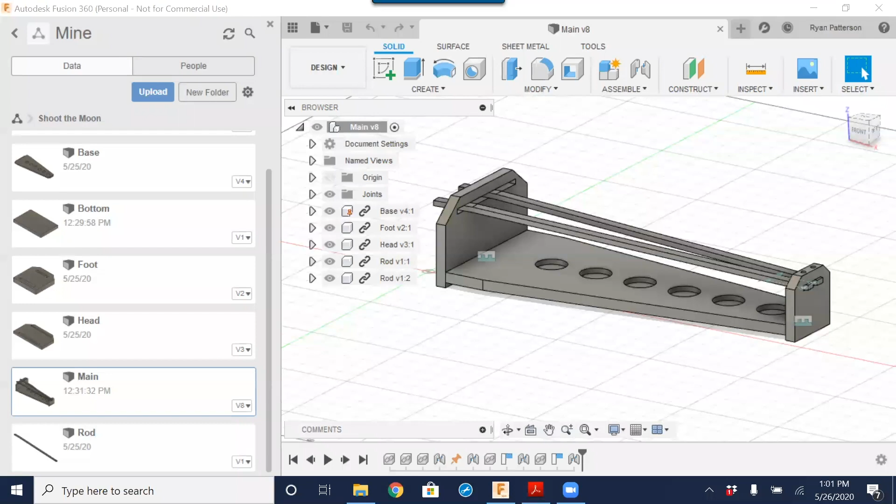So what Fusion is, it's more mechanical-based software that allows us to create individual components or parts and then assemble them as one to be able to constrain, lock them in, and build an assembly. And it's one way to really verify if all the parts are going to fit and function before you actually cut the product, build the product, and then in the end find out that that hole is in the wrong location. So what we see on the screen here now is the product that we're going to do.

We have it fairly well constrained. This is a game that is called Shoot the Moon. The idea of this game is we would set a little ball down here with this incline, and these here you raise in and out to try to get that ball to roll up the slope and drop it into the correct hole. So this is just a very basic assembly that we have. And again, today what we're going to be doing is focusing on drawing just the bottom section.

And I have a quick little drawing of what we have here. But before we get into the drawing, we have to orient ourselves with what Fusion is and how it lays out and works. So the first thing that we're going to look at is just the basic user interface. On the left side that we see here is kind of your projects. I call it the data pane. We could hide and show this pane by clicking the button here with the 9 little rectangles.

This is the area that is going to show all of your projects, all projects that are pinned by you, and projects that are shared with you or projects that you have shared. So this is a great way to work on a project as a team. You're able to share a project and multiple people are able to input and work on this project at the same time. So the first thing that we have, again, is the organization of what we have over here on the left side on the data pane. I am only showing projects that are owned by me.

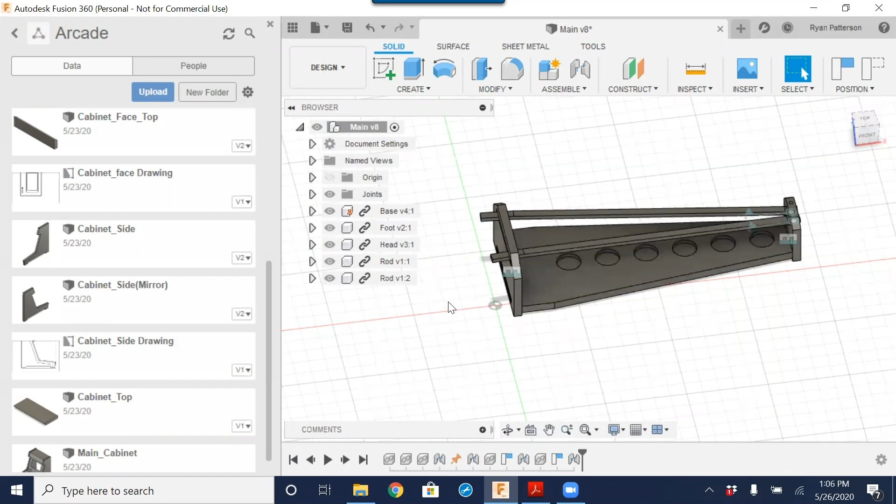And we're going to learn more about this as we go along. All components are able to be shared with one another, and only components or models that are within the same project can be shared with one another. So if I have my project up here, Arcade, and this product here that has several parts underneath it, I cannot share or link this part into this project. I'm able to make a copy of it and put it in here, but I'm not able to have it linked. We'll learn more about that as the days go on. So the first item that I would do is create one main project.

That main project will end up including all of your parts that you would ever make or that you would ever want to have shared within the project. So I created that with this project that's called Mine. That's all of my projects. Even though we have this item up here that's owned by me, each one of these listings is a separate project. So inside of this Mine project, I have created a folder and then a part.

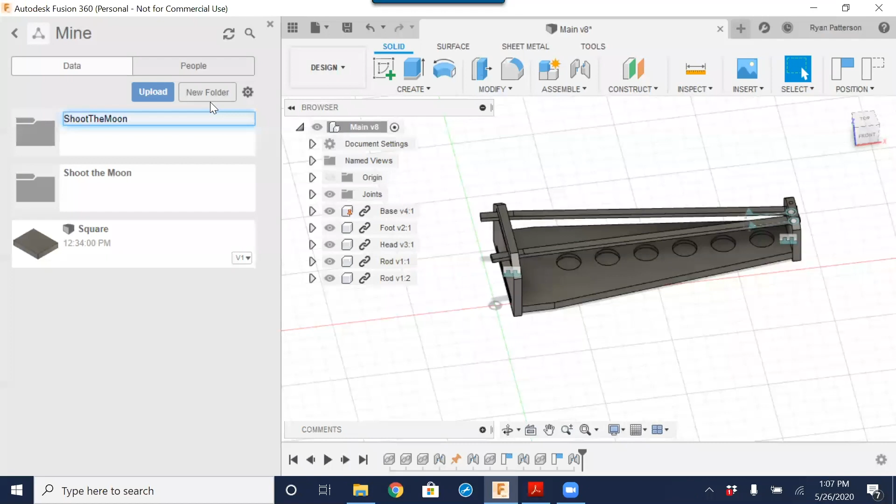So what we're going to do is create a new folder here, and I'm just going to call this Shoot the Moon 2. That just created a folder that I'm able to then add projects or add models and drawings to. So there is the folder on the left side.

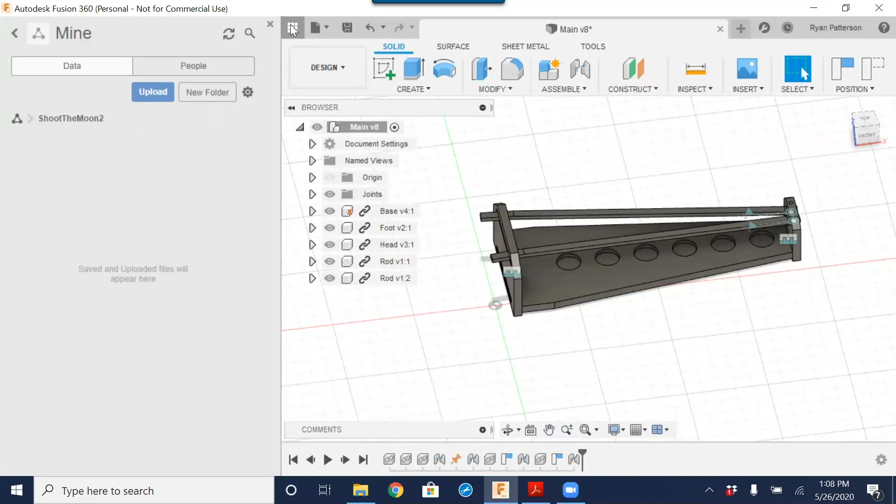I'm mainly going to be focusing within the application bar and our drawing canvas down below, so I'm going to close our data pane. We have multiple designs that we're able to have open at the same time. Currently, I only have this main one open, and then we have this plus sign right here. This plus sign allows us to start and open up a new model or a new design.

If we close the project or the assembly or whatever we have here, I can save my changes. It always will keep an untitled or a working version or a space opened up. You can never just simply close and completely close out of everything. It will always have an untitled version.

So this is where we're going to start with the untitled, which is basically going to the same thing as going to new and new design. So now we can see we have Untitled 1 and Untitled 2. Again, closing Untitled 1 leaves just one version of a workspace open.

To help orient ourselves with what we might be used to, there are a couple of changes we're going to make to our preferences. One is the key, the first one we're going to make. If you have opened up Fusion before, you will notice that your Z is really Y, and when you click the top, Y is facing up. That is not how we want to have it oriented.

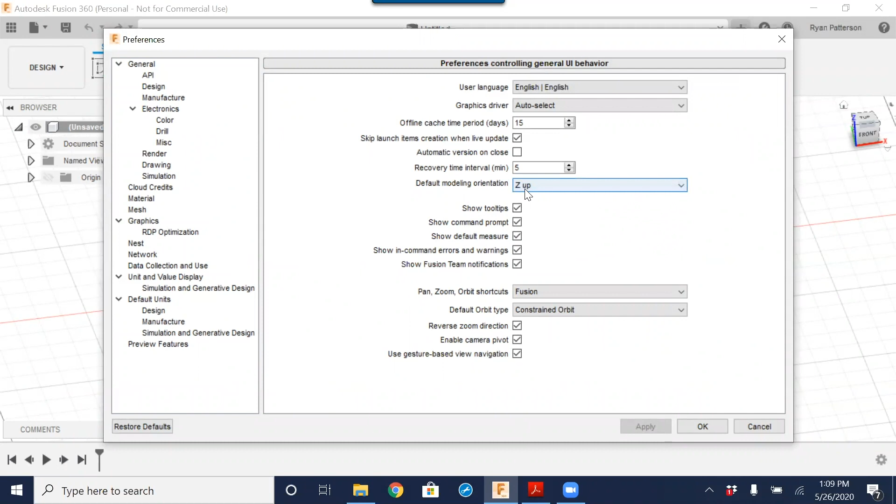Z is up. So to see what our preferences are, go into the upper right where your name is, and select Preferences. You have this option right here, Default Modeling Orientation. Z is up. By default, it's set to Y up, but Z is up. This kind of helps orient us a little bit more familiar with what we were used to on our CNC machines, so setting it that way is good.

Okay, so now what we have to create a part is sketches and bodies. Sketches are used to sketch out a two-dimensional version of our product or of our part, to later extrude that part to thickness.

So rule number one in anything creating with Fusion is creating components and putting objects and new parts on a new component. So think of a component as an actual part.

So just to point out, I will come back in and open up the original one. And so even though this opens up as one item, it is made up of several components. So, 1, 2, 3, 4, 5 different components that make up this assembly. That is what you want to think of as a component: a part that you would cut separately.

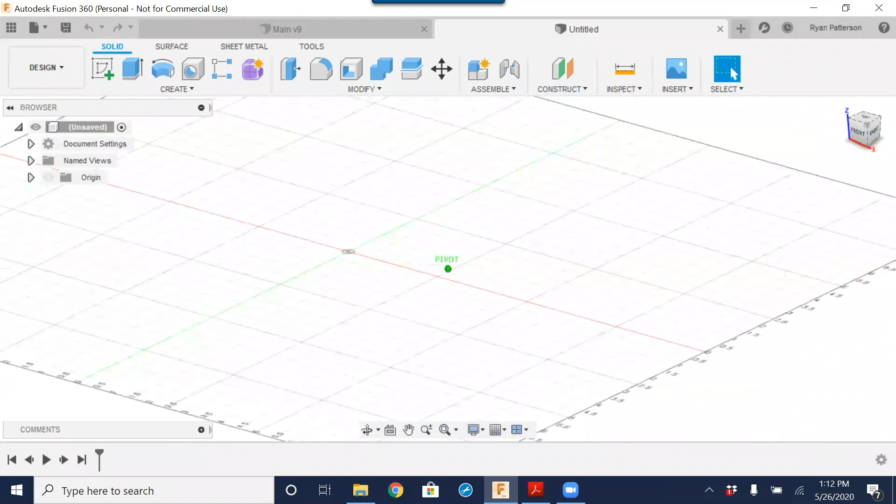The center mouse button is a pan, allows you to move and pan around. If you hold the shift key down and the center mouse button, that is the orbit that allows you to rotate around. You could also just come up and left click the orbiting cube, and rotate that cube around. If we want to see the top side, you would simply click the top. If you want to see the front side, you would click the front.

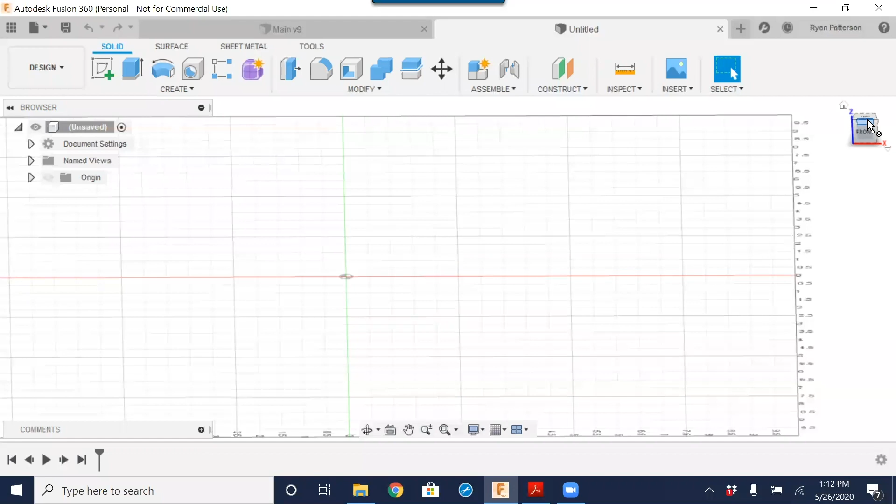And you could also click angling it there. That might be better seen once we have a part here.

But the first thing we're going to do to create and start drawing is creating a sketch. A sketch is the two-dimensional drawing that is going to represent the 3D shape or the actual part that we're going to build.

So rule number one, always make a component. I'm going to right click and click new component. This is our browser tree that gives us a history of what is going on in all of our different components. Right now it's saying unsaved because nothing has been saved, so let's make that the first step.

We'll call this base 2, because I already have a base 1 in here, I'm duplicating. The location to save it to should be under mine, Shoot the Moon 2. I'm going to make sure that it goes into that folder to help keep the project organized. So it's going into the Shoot the Moon 2 folder with the name base, and click save.

Now you might be wondering, well, where did that save? It didn't see any C drive, I didn't see any of that. Well, this is where the cloud comes in. It's floating up there somewhere, and it's always there when you're online. That used to be a thing to try to get used to, but with the cloud being what it is today, it's fairly easy to start understanding.

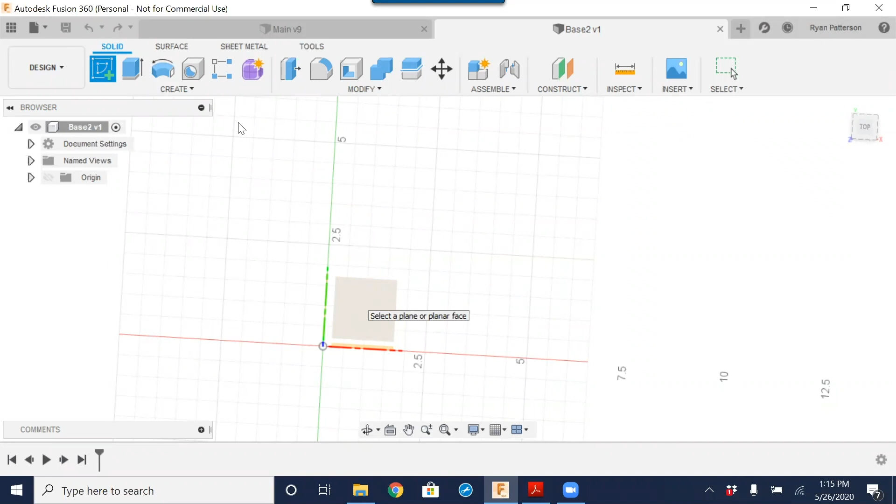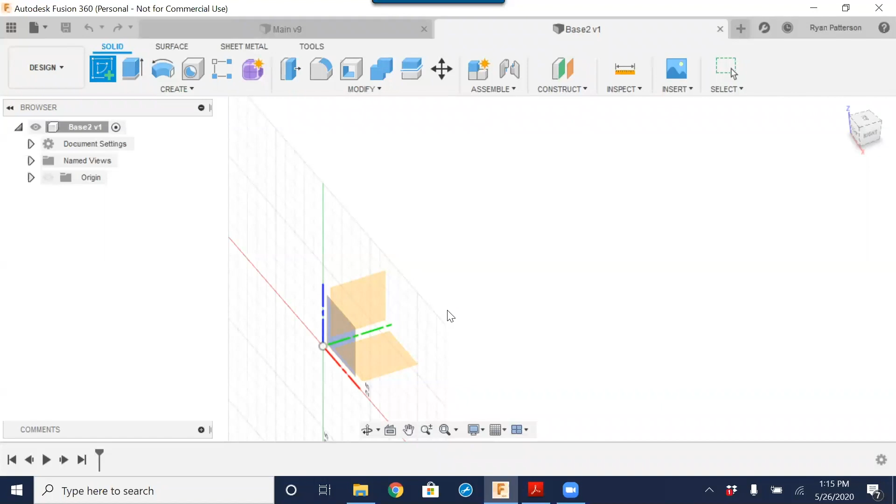I'm going to rotate this around so you can see how when you select each plane here, it goes gray. That means that's the plane we're going to draw on. You could also get yourself oriented by seeing the cube here - we have the top, right, left side, or the front side. So to help orient it, I'm just going to click on the top view plane, and then it aligns it to a top looking straight down on it.

At this point, we have our sketching tools, and our application bar has changed to objects or items that you might be more familiar with. A pan is the center mouse button, and we're just going to quickly sketch out the shape. I'm not going to worry a whole lot about the sizes of it, just basically sketch out the shape that I want to have here.

I'm not going to sketch in these tenons on the outside, just quickly sketch in the basic interior shape. Later we'll look at how to constrain and lock it all together, and that's where the real power of Fusion comes into it, with constraints and parametrics. We'll learn all about that.

So to sketch out a line, we're just going to use the line tool. Anywhere in the space, I'm not worried about exactly where it's being drawn, X, Y, or Z, because when we go to cut this, we're able to reorient the location of it. So this is just the location of where this part is going to be drawn in space, not actually where it's going to be cut.

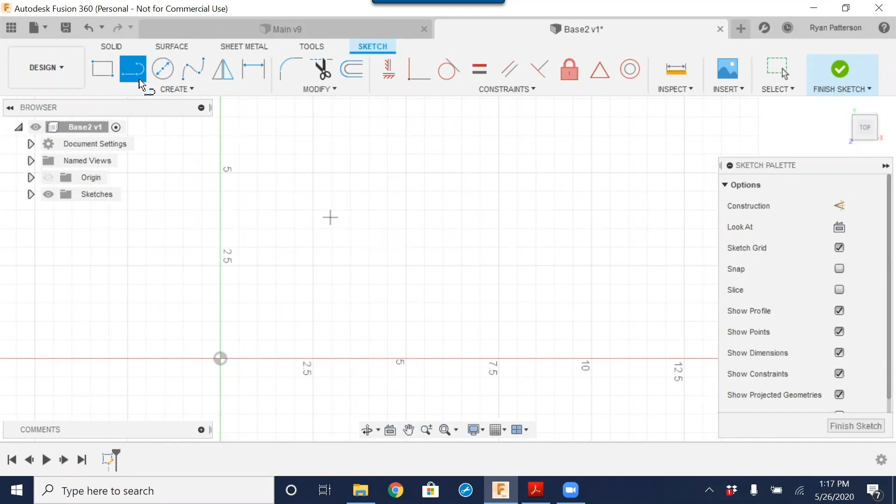With the line tool selected, I'm going to quickly sketch out. As we're sketching, we see the dimension on the left side changing, and we also get a degree that is changing. Notice when I go to 90 degrees, we get this little blue symbol that pops up right there - that's saying it's going to be a vertical constraint, and we'll see what that means. Going this way, we also have a horizontal constraint.

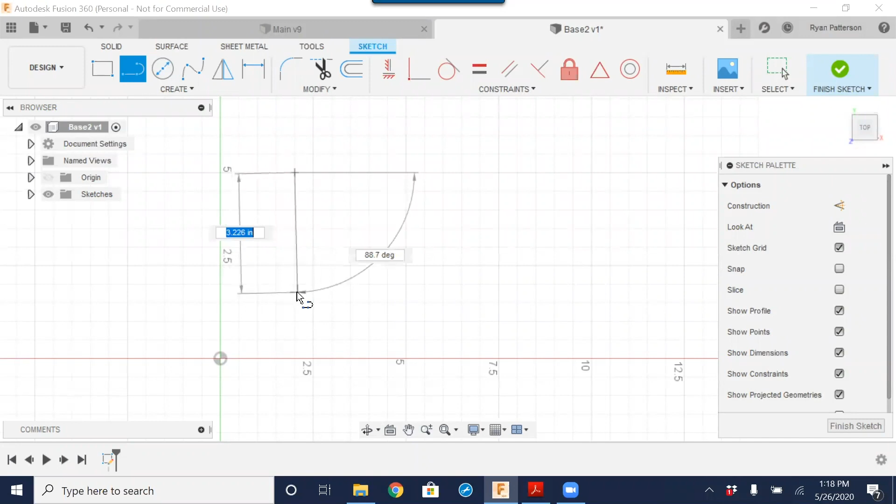If you do not want the snapping - as you see, I'm snapping, and it automatically kind of snaps to 90 degrees - if you hold control down as you are moving and drawing around, it does not snap. I do want that to be snapped at a vertical plane.

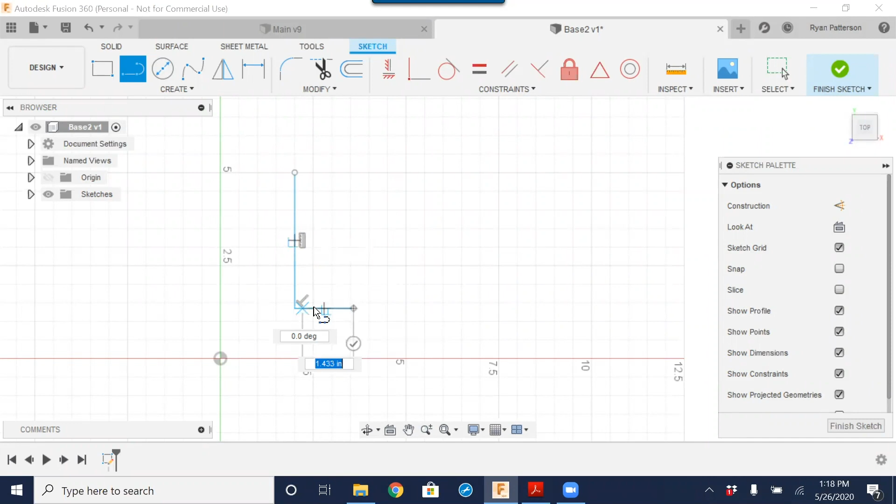Moving over to the right, notice that we aren't getting that horizontal constraint there, but we are getting a little 90-degree right triangle or right angle constraint pointing out. So I'm going to select there, and notice that symbol has changed here. Those are what constraints are all about, and we'll see what those are as we go.

I'm just going to draw out roughly the size that it needs to be - it's roughly 17, 18 inches long, snapping at 90 degrees up.

All right, so now we have this shape here. It's not quite closed, it's not what we want, but now it's time to lock this in and

try to constrain all of our items through dimensioning and construction lines. We do have a couple constraints that were automatically placed in. These are the right angle, so that means that this line section here can always be and will always be right angle to one another. This is a constraint for vertical, so that means when we move this point,

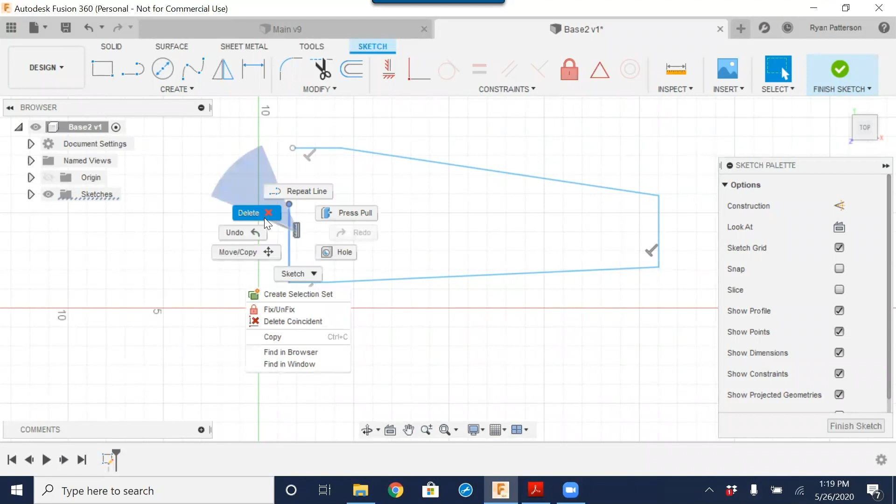this line will never rotate. As an example, I'm going to right-click and delete that constraint. Now that means that you can see everything is moving. It's at an angle, it's just kind of all over the place. Hard to really control what's going on.

But notice this line down here, with that being a 90-degree constraint, that is staying at 90 degrees to that line.

So to start really constraining and pulling this all together, we have our constraints listed above here. So if I always want to have that line horizontal, I'm going to use the horizontal vertical constraint, selecting it, it turns blue,

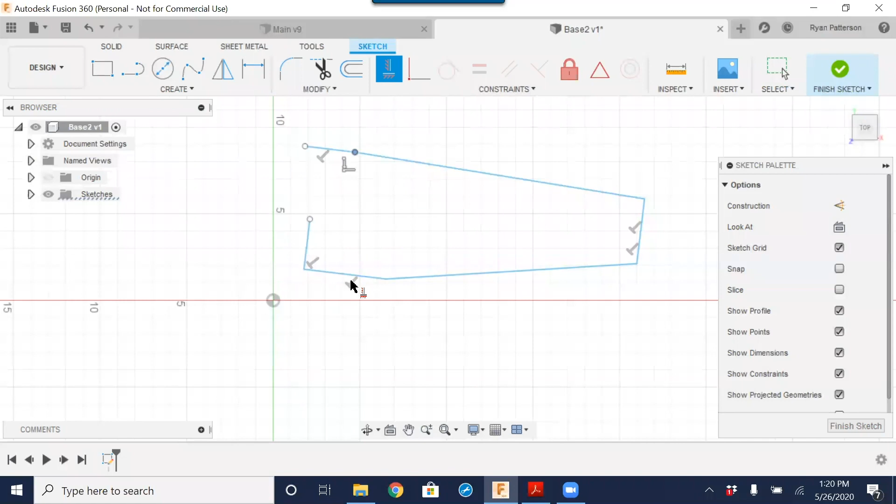and then coming down and selecting the object that I want to have constrained. Now, some of the issues that you end up with, over constraints will not allow you to select and create those. So removing those and doing a horizontal constraint there. This one I want to have as a horizontal.

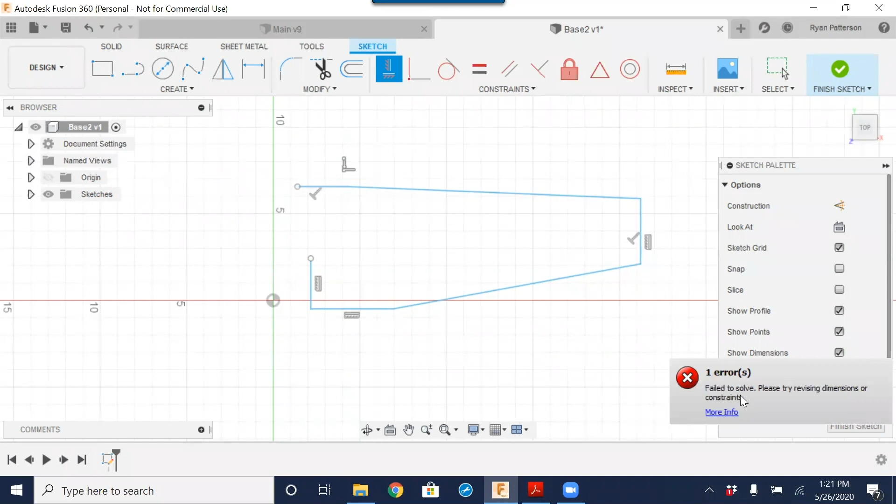And here is one of the options that you get when you're over constrained. So it's telling me that I can't do that because one or more of the other constraints is giving me issues. So that kind of sometimes plays into when you have the automatic constraints that kind of happen, and it's sometimes difficult to see where they're constraining to.

So I'm going to remove those constraints. I've now separated those, we're okay with that. I'm going to use our constraining tool here again to a horizontal.

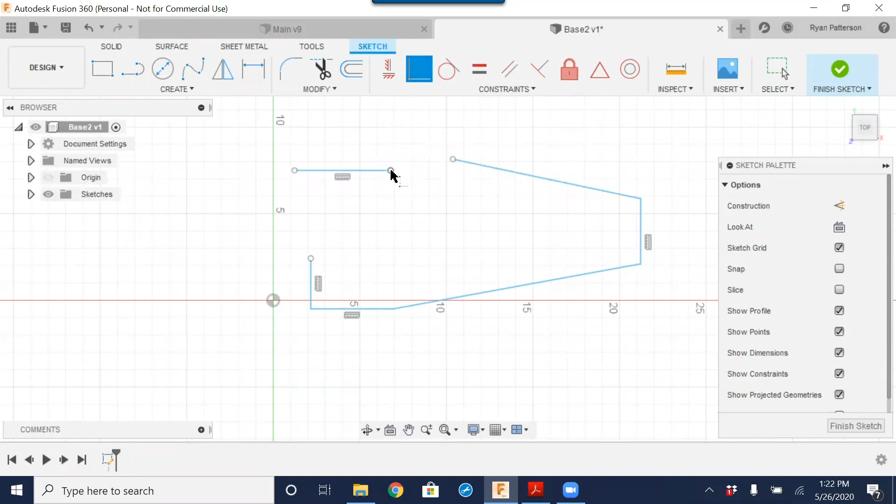And we have this coincident constraint. This allows us to connect two ends together. That's saying that I always want to have this point and that point together. I'm going to do the same thing for this point and this point.

So there is kind of the basic closed shape with four horizontal and vertical constraints. Hitting the escape key gets us back out of all of our selected tools and just into our regular movement commands. Well, you see, we're still able to shift things around, and we want to have more control over top of this.

And the idea of constraints and what we want to be able to do is lock all of these points in through constraints and dimensioning, so that none of, when you move one point, the whole product, all of our lines shift with that point.

So the first thing I want to do is keep symmetrical. So the left side or the bottom side and the top side from the midpoint, I want to have the same. So to do that, we're going to use a construction line.

So construction lines are drawn and can be constrained the same way that a line itself is drawn, although it is ignored when we go to create the push-pull, the extrusion of this part, which we will see in just a few minutes. So to create a construction line, it doesn't matter what order you do this in.

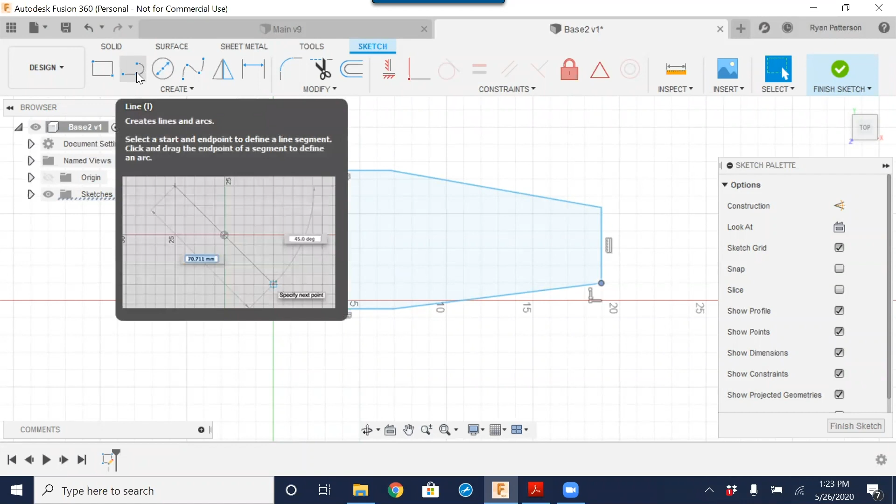You could click the line tool and then come over here to the construction and put a checkbox there, or you could click the construction box and then come over to the line. It doesn't matter.

I'm going to start the line and notice that I have this X that is snapping to that line, meaning that my construction line is going to be constrained to this vertical line. Moving closer to the midpoint shows that that line is now snapping to the midpoint. So I'm going to click from the midpoint of that line, and come over here to the opposite end and also snap that line also to the midpoint.

Hitting the escape key, again, closes out and gets you out of all of the tools. So we now have a construction line with the two endpoints snapped and locked into the midpoint of both ends. So again, when we move these around, now we can see that they are going symmetrically from that midpoint.

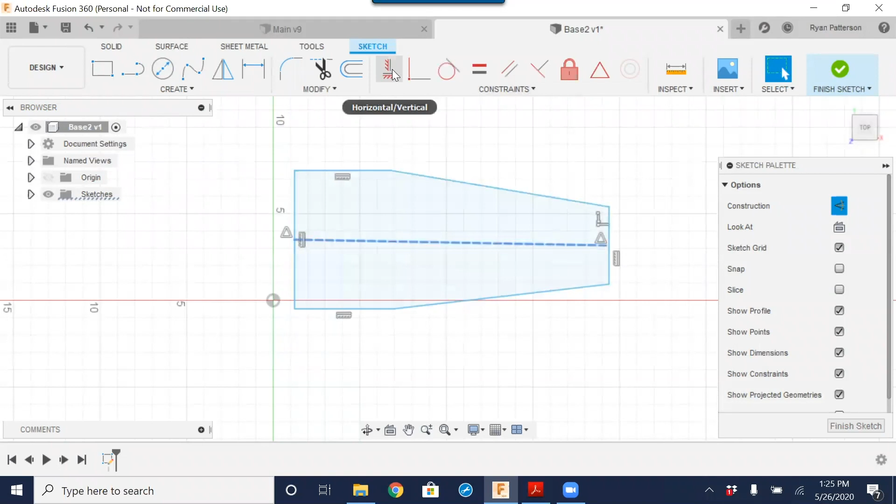The one thing that is not set is we are not completely symmetrical because our construction line is set at an angle. It is not a horizontal line. So we want to constrain our construction line horizontal. So selecting the horizontal tool and coming down and selecting the construction line. And we could stretch that back out to get that drawn.

And when you start constraining, you'll notice that some weird things start happening like that. But that's okay. We're starting to lock in and really confine this down. So we have an endpoint here and an endpoint right here. So we also want to be able to constrain that. There are several ways of doing this. You could simply use constraints to constrain this point to this point, horizontal or vertical to one another. I like to use the construction lines because it's more visual to see what's going on.

So snapping a line across both of those and changing that to horizontal. We can see that helps control us a little bit more on the width here. So we're almost constrained. We're pretty well constrained top and bottom. Now we just need to go horizontally with that. And at this point, we're locked in with our shape. Now we have to start dimensioning our size, and this is going to finish locking and constraining everything down.

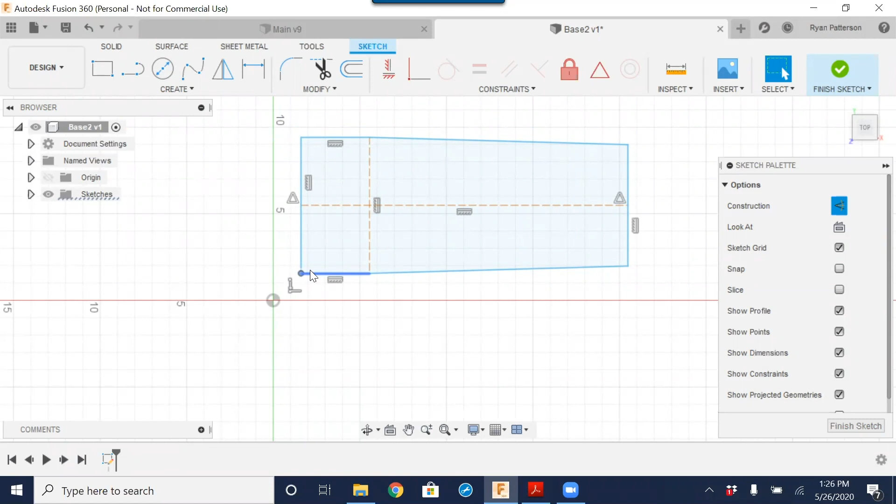So I'm just going to jump over to our 2D view so I can see what we have for dimensions here. So I have 7 inches on the outside, 3 inches in, and I'm actually missing a dimension. I need to know what this number is from end to end. I believe it's 17 inches. So 7, 3, and 17.

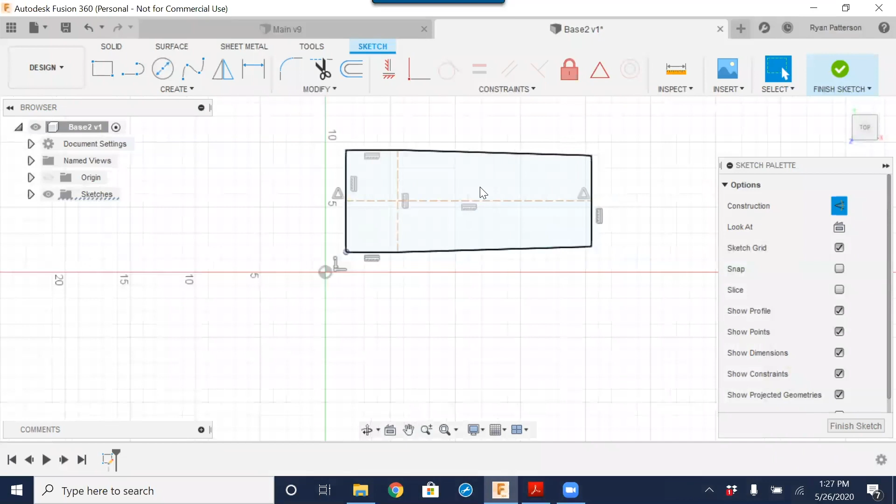So I'm first going to draw a dimension line to set the size from this line here by clicking the dimension tool. That line was already pre-selected, so it's saying that's where you want that dimension to be set from. If I just escape that, with nothing selected, you see no dark blue, selecting the dimension tool now wants you to come down and select a line that you want to have dimensioned. Okay. Now it's asking for a size. So I'm going to enter in 1.5, and that sets that size dimension here.

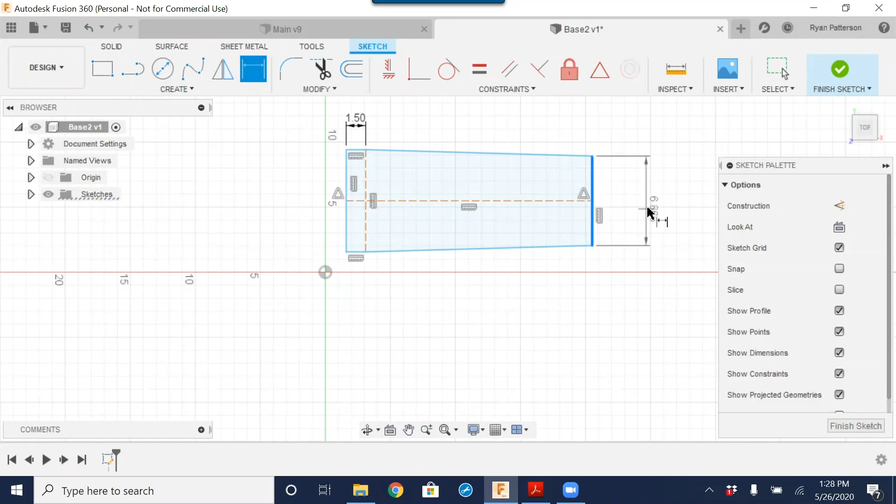The dimension tool is still in effect. I know that because of the blue square around the dimensioning, and also if you notice underneath my mouse cursor, it's got little dimension lines there that say I'm in the dimensioning tool. So I'm able to continue selecting lines that I want to have dimensioned. I'm going to set this side to be 3 inches.

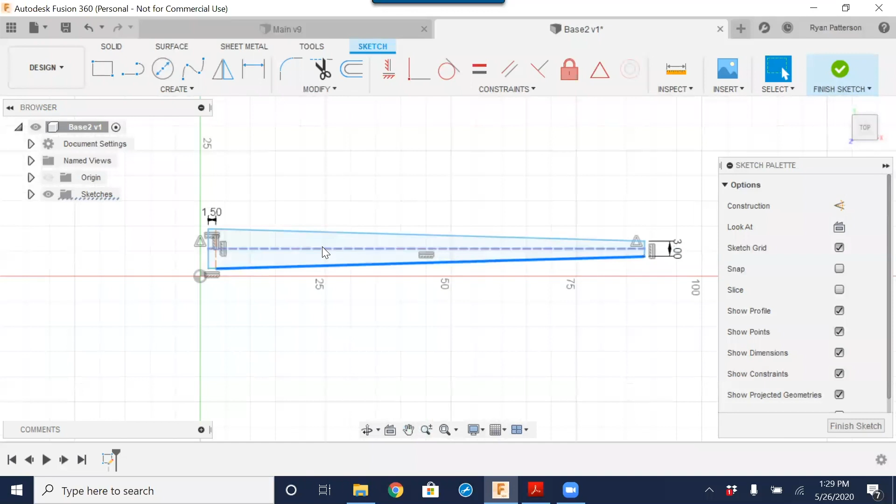Now this is an angled line, so you might think that you're going to select that, and well, no. I want to get a dimension from this point to this point. And there's a couple ways of doing that. I could simply dimension the construction line, which is one reason that I like to have construction lines drawn. Or I could select the outside, that's really not what I want yet, but then come over and select the other line, which is going to create that horizontal dimension that I'm going to make 17 inches.

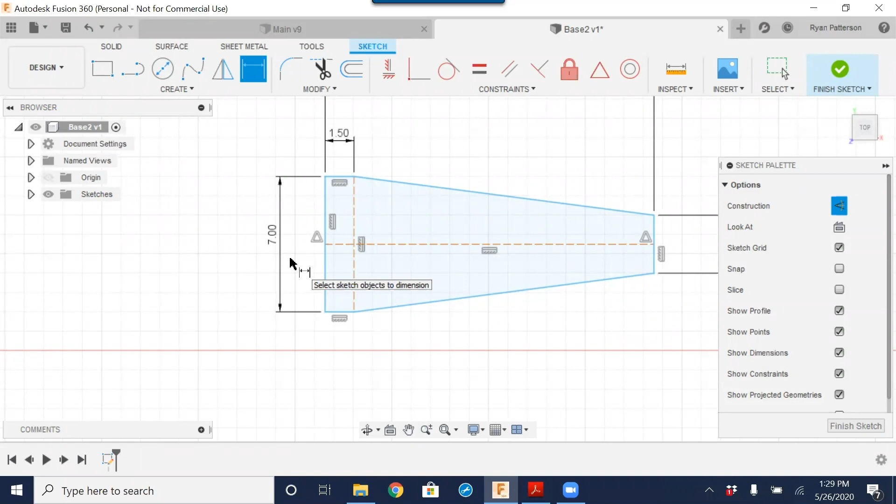The one final dimension that we want is this outside, and we're going to make that 7 inches. So that is the basic dimensioning of the product and the basic overall size of the item.

So I got a recommendation to go from inches to millimeters. I don't know why people use millimeters, it's so much more of a challenge dividing by 1/128th. But if you really want to take the easy way out and divide by 10, all that is set in your preferences, and you can set your units and how you work within Fusion here.

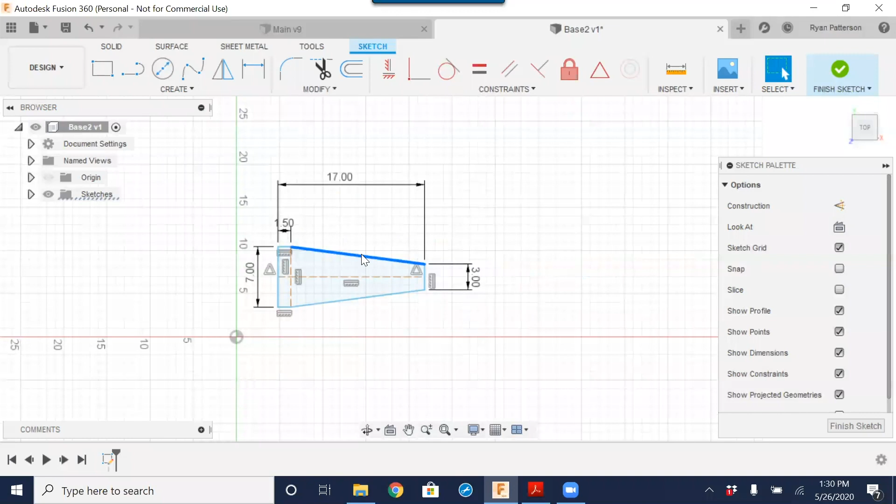All right, so now we have pretty much a fully constrained item, and we can see that simply because I am able to grab any one of these lines or endpoints, and the whole object moves with it. There isn't any point or line that is moving on its own. So the beauty of Fusion now is, if I realize I did not want this dimension at 3 inches, I wanted it to be 4 inches.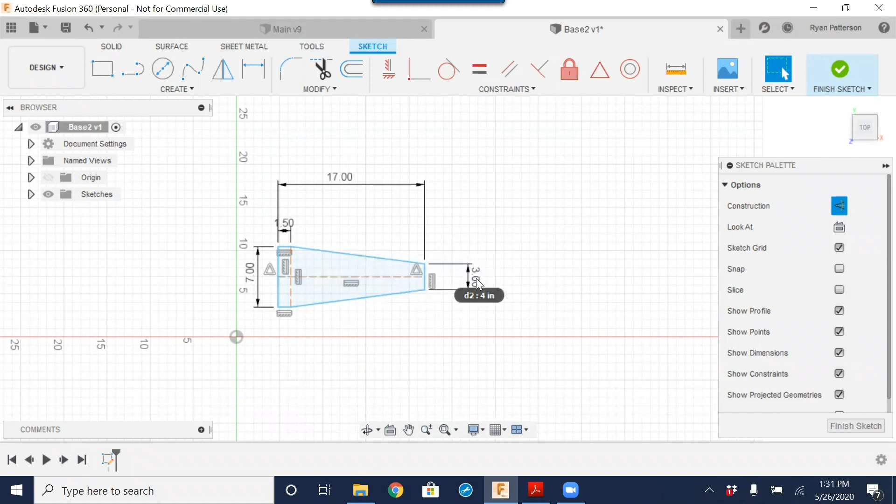You could simply double click on that, enter in 4, and you see that is stretched out symmetrically from our midpoint construction line to 4 inches. It gets even better than this. So we are now going to see how we could go from this to an actual 3-dimensional shape or product.

So we're done with the sketching. We could click Finish Sketch, and that just gives us the highlight of the sketch. So even though it kind of looks the same, we are not in our sketch at all anymore. And I should mention there are 100 different ways of getting to this same goal. This is just one way that I've kind of found my way into it.

Again, I use construction lines in my sketches a lot. I know a lot of other people don't, and just constrain from one point to another point. There's nothing wrong with that. It's just how I'm accustomed to and the way I learned.

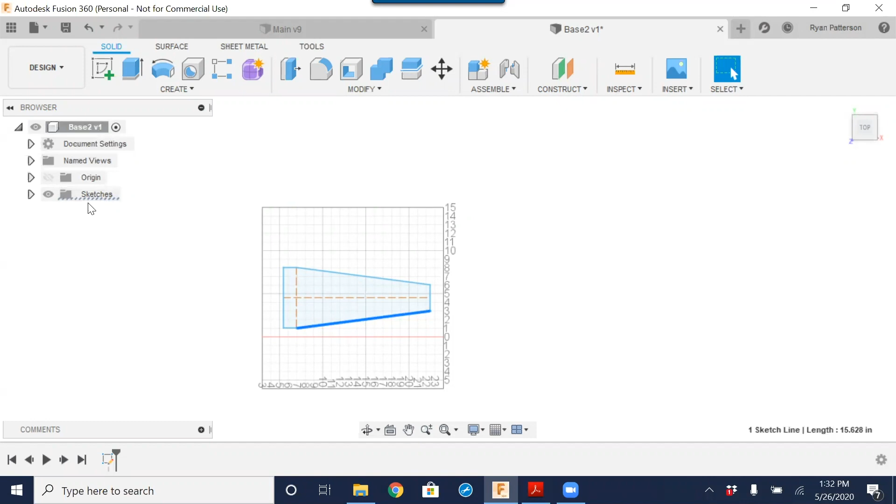So at this point, our sketch is closed, and we could see in our browser tree here, we have our sketches. And I can always get into that sketch again by right-clicking and clicking Edit Sketch, which brings up those dimensions, and I could change those.

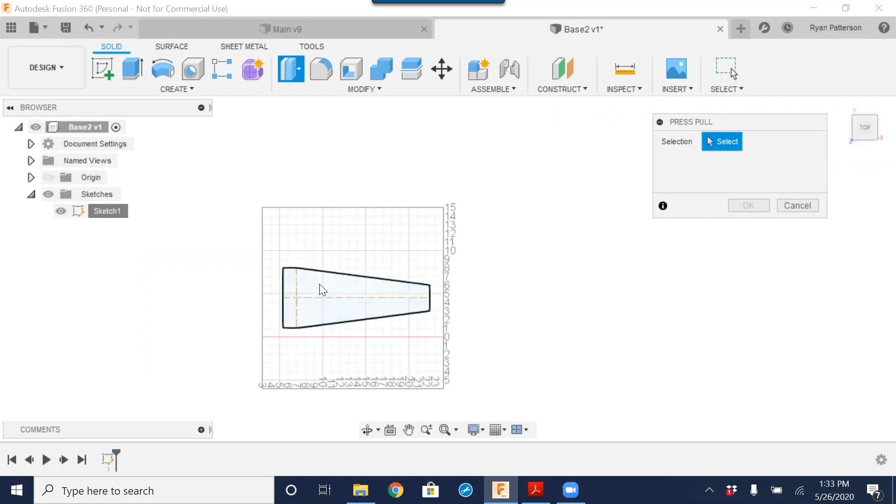Okay, click Finish Sketch. And now what I want to do is use our press pull tool to extrude this to give it thickness. I click that right here with the press pull. Clicking inside of the object, you see how it kind of turns black. Selecting there brings up some dimensions and a distance. I'm just going to simply rotate this around because we get this arrow showing up. I can grab that arrow and stretch that out.

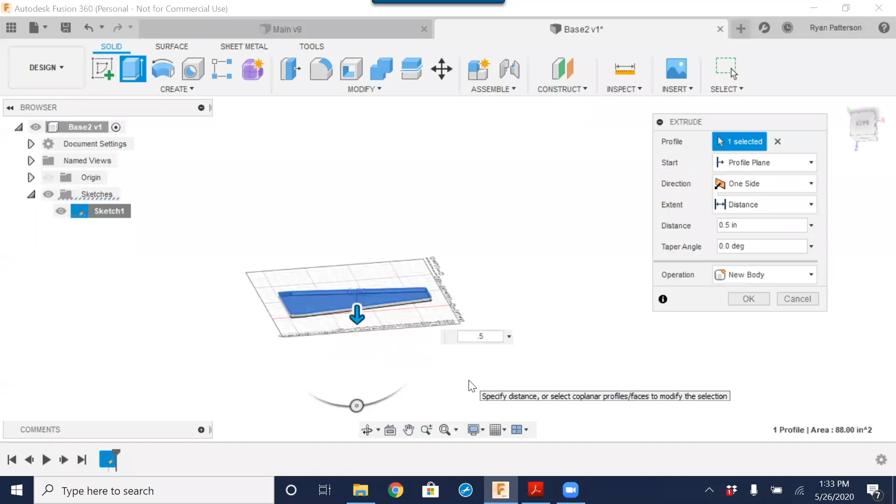The circles are also on a sketch. And as we saw when we first created the sketch, we chose an axis plane to draw that sketch on. Now that we have an actual item, we're able to select faces to sketch on top of. I can see I'm viewing the top side by the top cube here. And when you hover your mouse over the product, you see it shading a different colored gray. That means that is going to be the selected face.

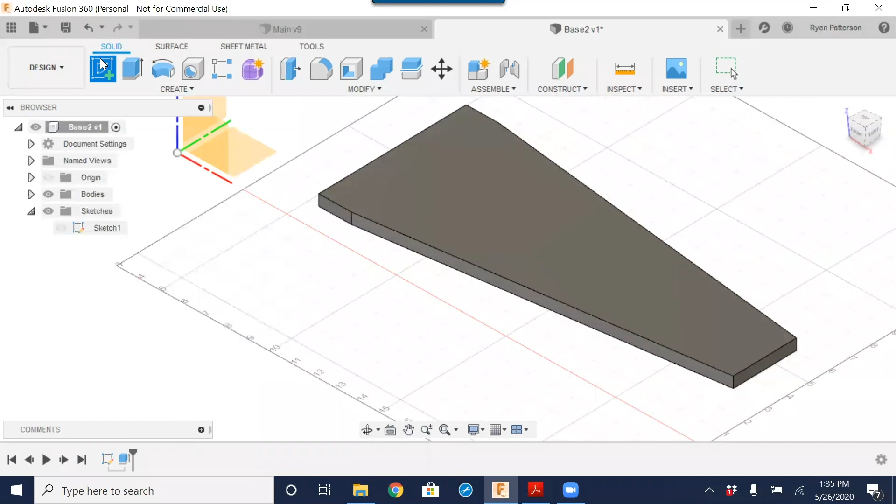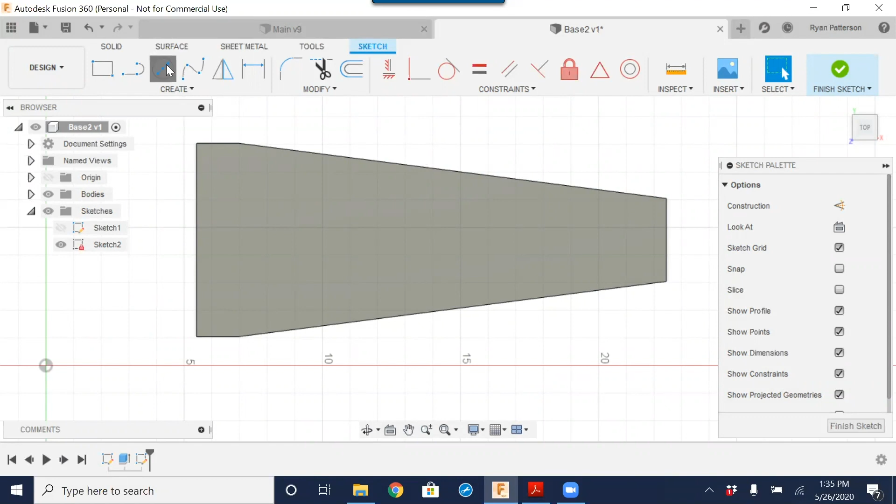So this time when we go to create a sketch, our axis planes show up here, only this time I'm not going to select the axis planes, I'm going to select the top face of our product. We are now in the same sketching pattern as we were when we were drawing the outline. This time, we're going to draw out our circles. We have 6 circles, and again, there are a couple different ways of doing this. I could draw just one circle and use a pattern copy, or I could draw out 6 copies and link them and constrain them together.

So I'm going to do just that. I'm going to draw a total of 6 circles. I'm not really going to worry about the spacing or the sizing of them. And I'm also not allowing them to constrain automatically to one another. As you become more efficient in understanding the constraints, you would want to draw them out constraining to one another. Just one more here. So now with the circles created, I want to start constraining and locking these in.

And again, like I said, I like to use the construction lines. There are other ways of doing it, but construction lines are one way for me to visually see that these are all locked together. So I'm going to simply click the line tool and come over to the options and set that to be a construction line. These circles all need to line up through the center of our product. So I'm going to snap to the center, automatically snapping my construction line to the center of each circle. And then the last point, I'm snapping to the midpoint.

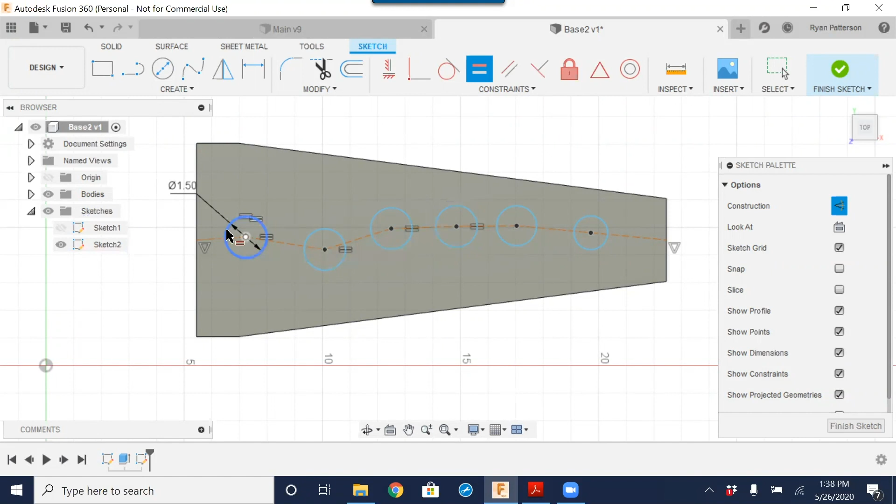Now you can't just continue on and say these all need to be equal. I'm going to select each one individually, and you notice the master for each one gets another circle added to it. And again, there's probably another dozen different ways of being able to constrain the size of those circles altogether. I like to do it the way I did it, using the master. I could have said this one equal to this one, then this one to this one, and so on. But having all of these linked to the one that is dimensioned kind of helps me organize things a little bit later down the road.

So at this point, I want to start aligning all these circles and get them in a straight line. To do that, we're going to use the horizontal vertical tool and simply select that line that I want to have horizontal. And as we do this, things are going to shift around. Circles are going to get all out of whack. That's okay. I'm going to just drag them over and kind of do them one by one.

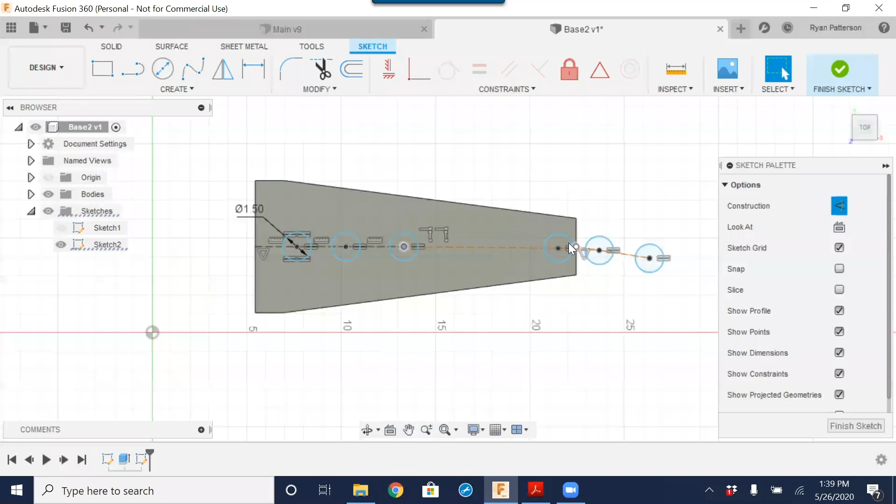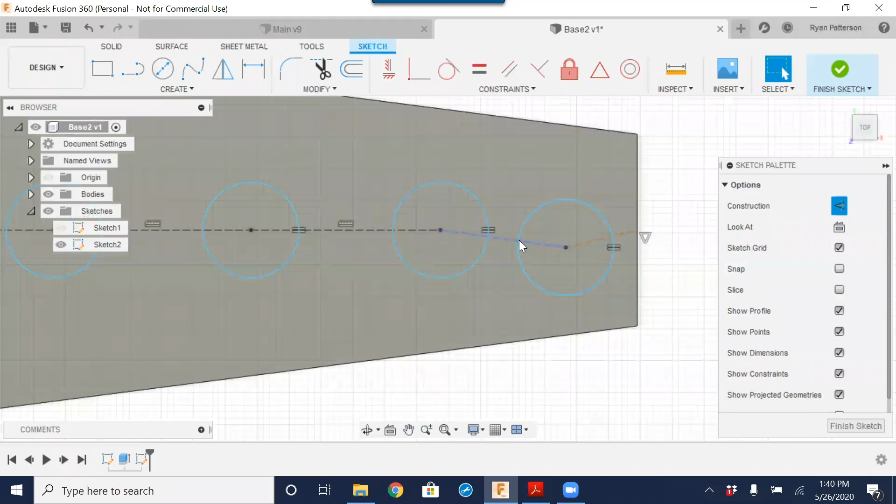One more I'm going to bring over, make sure it fits there. This line to be horizontal. So now all of those circles are locked in a horizontal constraint. They cannot move up or down. They could still move horizontally across our shape. And that is all right.

So the next thing is the dimension. The spacing between each hole is 2.38 inches. So again, using the dimensioning tool, I'm going to dimension just one of our construction lines. I'm going to label that 2.38. And then again, using the equals, the same as we did for the circle, we are going to constrain each horizontal construction line to be equal to our dimension line.

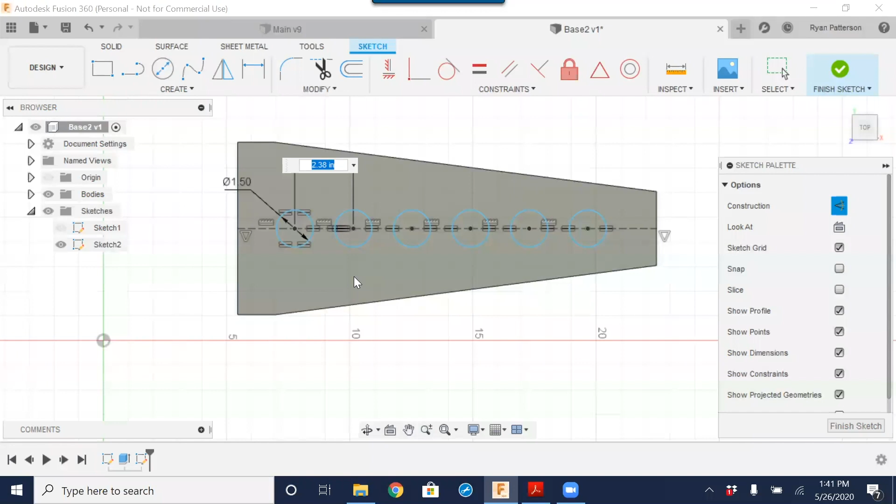Again, hitting the equal sign, that line is equal to this one. Again, just going through and selecting them all to make sure that they all have the same value. So by having all of these lines equal, we are now constrained in the spacing of all these circles linked to one dimension. If I wanted to set that spacing a little bit greater, just double clicking on that dimension and changing that, we can see that they all grew out equally.

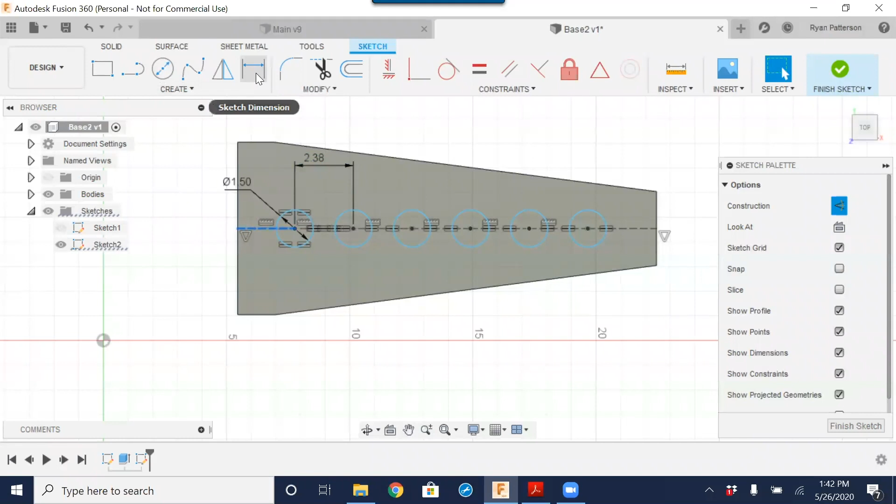The other dimension that we need is the one right here, and just going back to my two-dimensional drawing, it's 3.5 inches. That line selected, use the dimension tool and change that to 3.5, and there is our layout. So now we have 6 holes here, and they are all constrained to one another. And as we see, if you grab and try to move any one of them, they do not move in any direction. That is telling me that they are fully constrained and locked in place.

So with the constraints being set to the midpoint of this line and our original sketch also being linked to the midpoint, when we change one, they will always be linked in the center. So once that is all done, we're going to click to finish this sketch, and we see the two-dimensional sketch representation on top of our part.

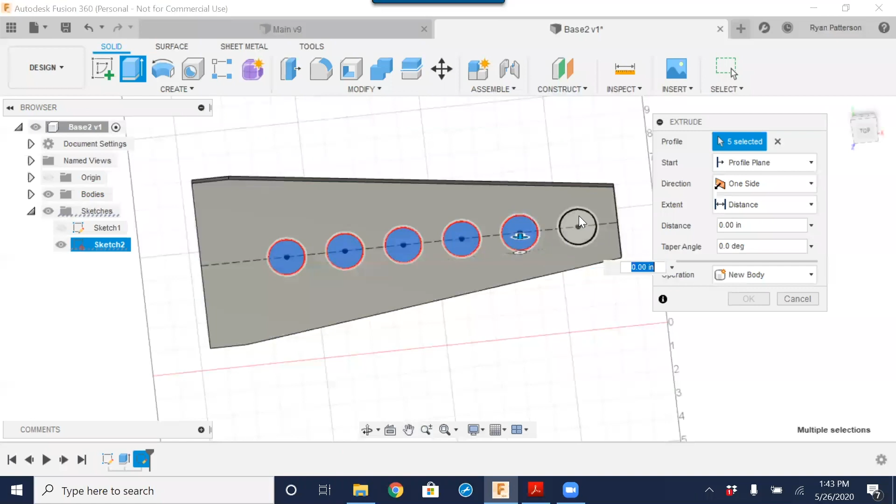Again, using the same push-pull, I'm going to come in and select all of the circles that I want to modify. I'm just going to rotate this so we can see what's happening. So I can pull them out this way and have them pop up, which is not what we want. If we wanted holes, we would simply pull them all the way through, but these are just pocketed holes that are cut 1/4 inch into the material. So I'm going to enter in -0.25 and then enter.

So that closes the sketch tools, and we now have 2 sketches: our main sketch, and then our sketch on top of it, which is the circles.

Through all of our process of creating this object, Fusion is also keeping a timeline or a list of operations that have been completed. And we can see that down below here. So we have sketch number 1, our extruded tool, sketch number 2, and then our extruding of those holes.

So if we don't want to see those holes, you could simply move this bar over in the timeline to kind of hide them. They're still there. They're just moved back in time before they were created. So we can move forward into the future by moving that slider bar to the right.

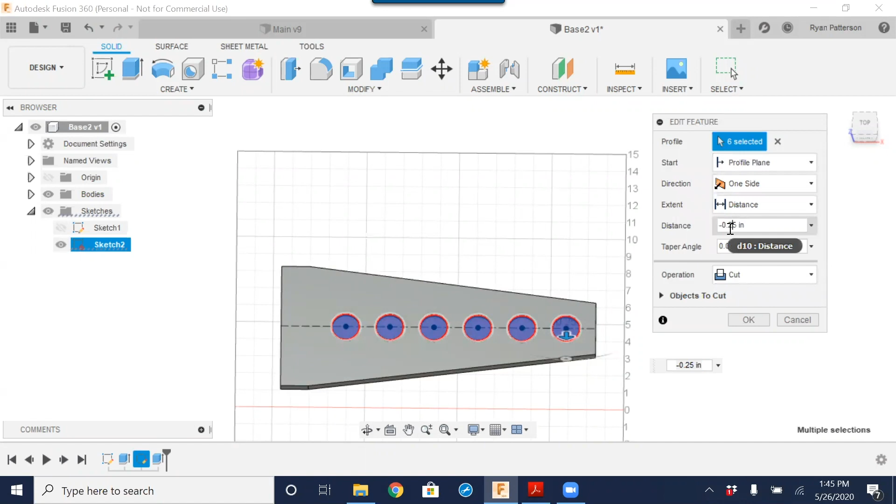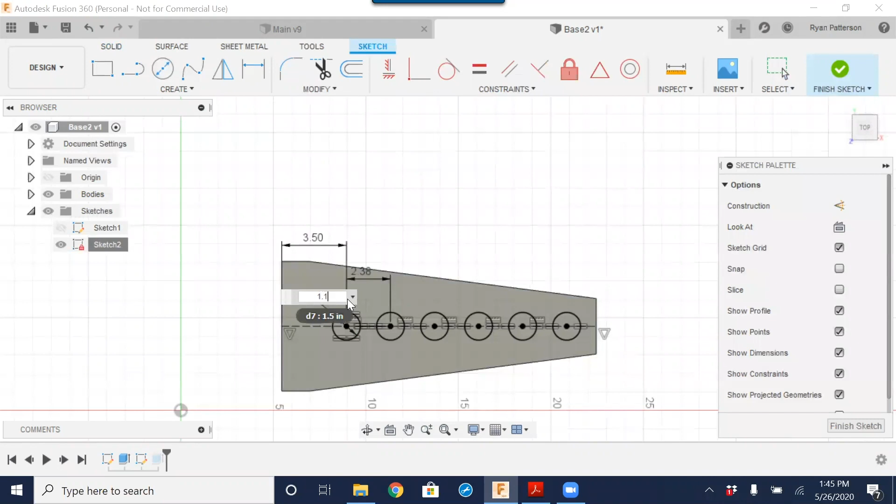And again, if we realize that those holes should not be 1.5 inches, they should only be 1 1/8 inch, we could simply right-click on our sketch, select Edit Sketch and change the value of this here to 1 1/8. And all of those holes, since we've constrained them to be equal, all go to the same size. And again, to get out of the sketch, we're going to click Finish Sketch.

So the final 2 items that we need to draw in place here are the tenons on the outside here. Got one on the left side, one on the right side. To draw that, I am going to have a total of 2 more sketches, one on the right end, one on the left end. And to create a sketch again, just simply come up to Create Sketch and select the face or the plane that you want to have this sketch applied to.

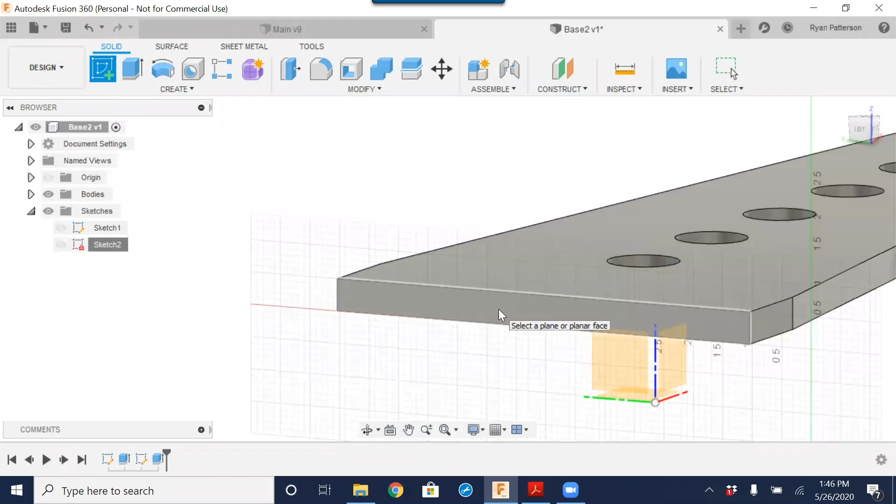So selecting the end, we are now sketching on the end of our product, or they're calling it actually the left side. I'm just going to draw out a rectangle using the rectangle tool. I will now need to constrain this rectangle. So as we see, we can stretch and move that anywhere we want.

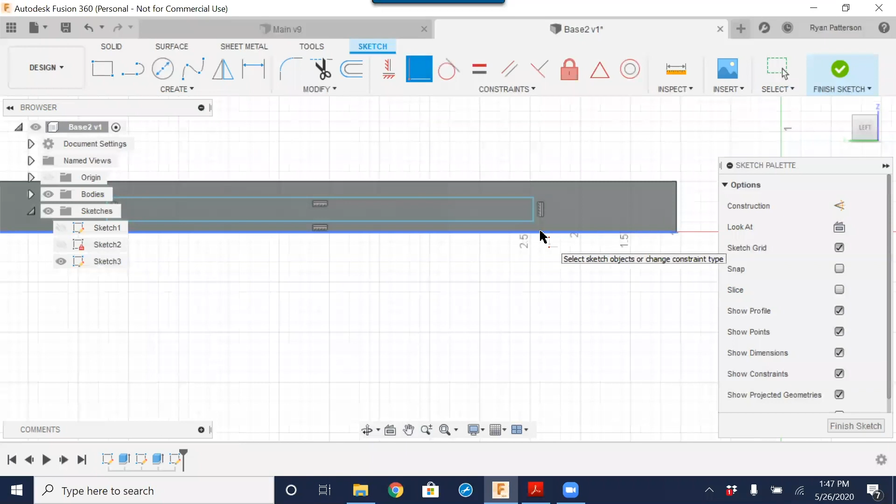The first thing I want to do is make this bottom side be at the same location. So I'm going to use the coincident tool, selecting the point, the two objects are the point to the line, and we see now that it is connected to the bottom. When we move around, it is not moving off of the bottom, but it is staying.

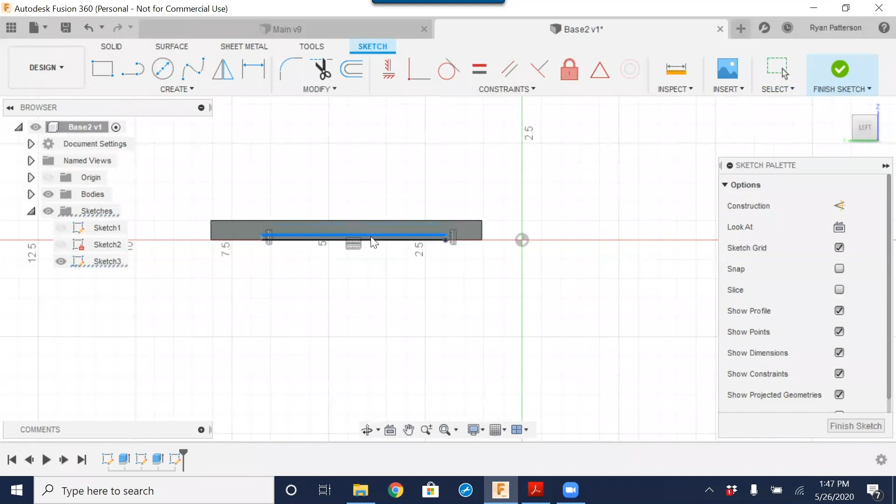So there's two other dimensions that we need to set. And again, there are a couple ways of doing this. I could draw out two construction lines, one from the endpoint to here, and this endpoint to this one, then use the equals tool to make this one equal to this one. Or I could use a construction line from the midpoint to the top midpoint. So I'm going to try it that way.

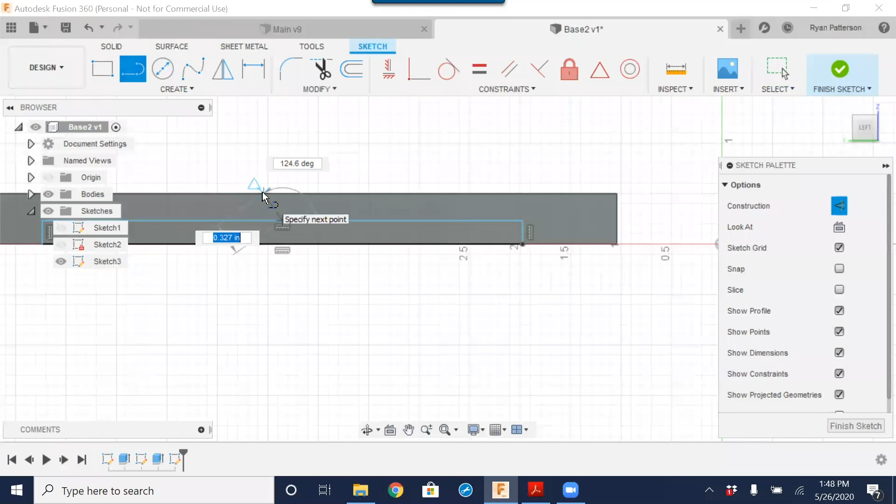So I'm going to go to the line, making sure that it's set to construction, snapping to the midpoint, and then coming up to the top, and also snapping to the midpoint there. That line here, we want to have vertical. So just simply clicking the horizontal/vertical tool. We have now constrained our rectangle to be basically symmetrical left and right.

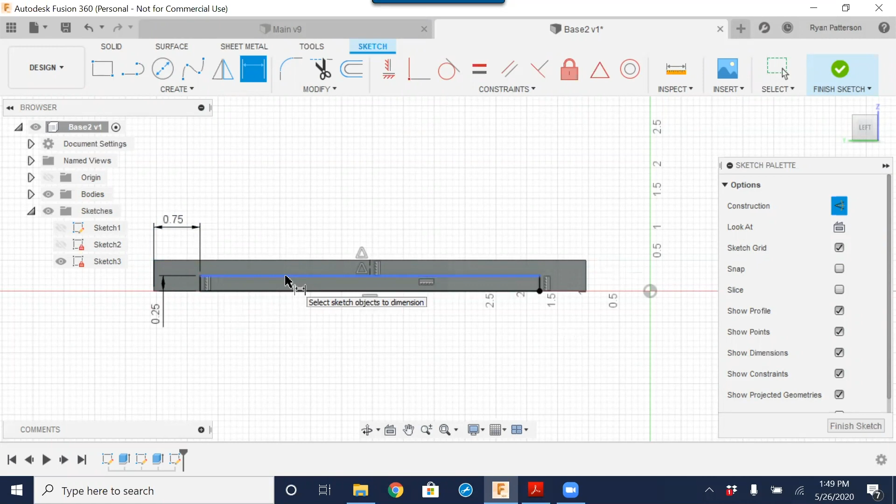At this point, I'm just going to use the dimensioning tools to finish and lock all of the constraints in. I'm going to set the height from this one point to there to be 1/4 of an inch. From the endpoint to the endpoint, I want to have maybe 3/4 of an inch. We could have dimensioned the endpoints here as I did, or I could have dimensioned the point in the center here. So again, if you don't want that dimension, you simply click delete and we're done.

So you see how that just kind of brought it back. There is one thing that I'll mention that's happening here: when we right click, so I'm selecting this, right clicking, and as I rotate this around, we see this cone shoot out from the center of our rotation. This is used to say that when the mouse is in this cone here, we're going to do an undo. When it's in this section here, it is going to be a delete.

So this is very useful as you become familiar with the software and being able to get around doing what's called gestures.

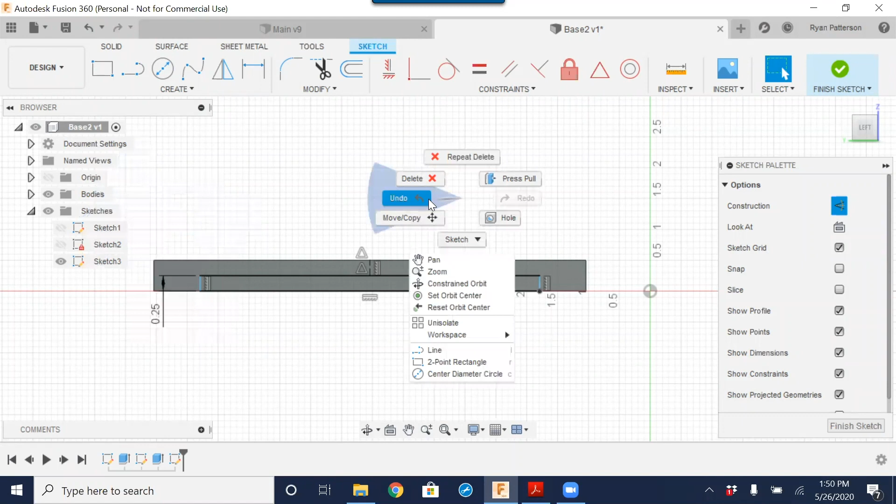So knowing that the undo is directly to the left, we're going to see how that works. I'm going to delete that. And when you right click, you get this line that stretches. So we just simply click and drag, and the menu didn't pop open, but that was a gesture to the left to indicate undo, which undid this.

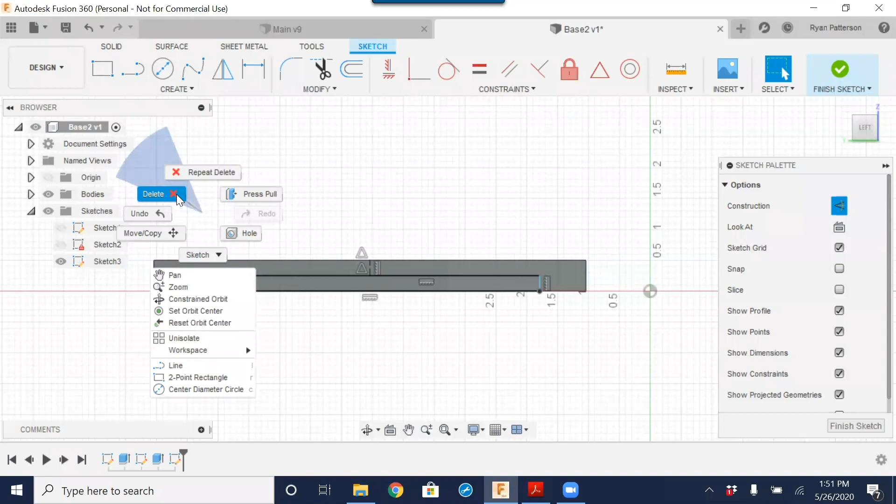So the delete I knew was in this area up here from the center. So I could select and just stretch right up to where that virtual delete would have been by seeing that right click. So gesturing helps speed up the process of designing a lot.

So again, I had that dimension on the outside. I could have also just dimensioned this line right here to keep it symmetrical. And let's say that's 5 inches. And now with the constraint to midpoint, it is keeping equal distance off of each end.

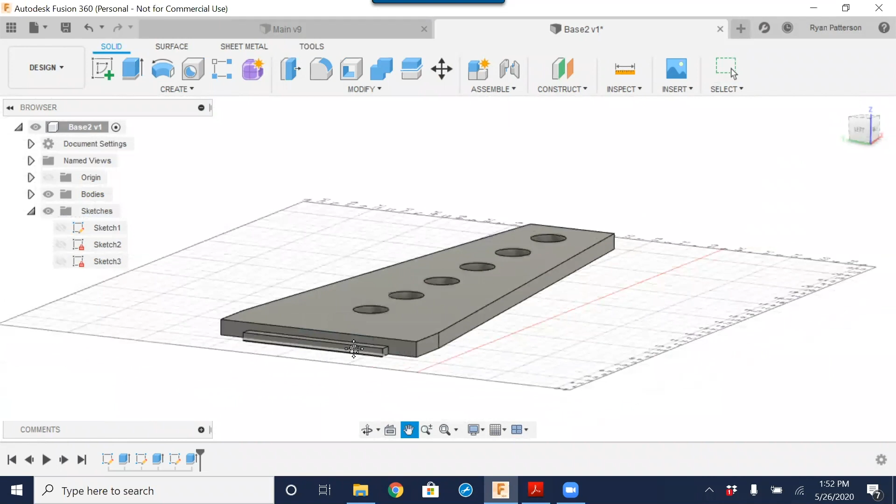So with that side complete, I'm going to finish the sketch. And again, we see the outline of that sketch. And I want to extrude or pull that sketch off of the product outwards by 3/8 of an inch and enter. So I'm going to rotate around, and I'm doing that by holding the Shift key down and the center mouse button or the center wheel.

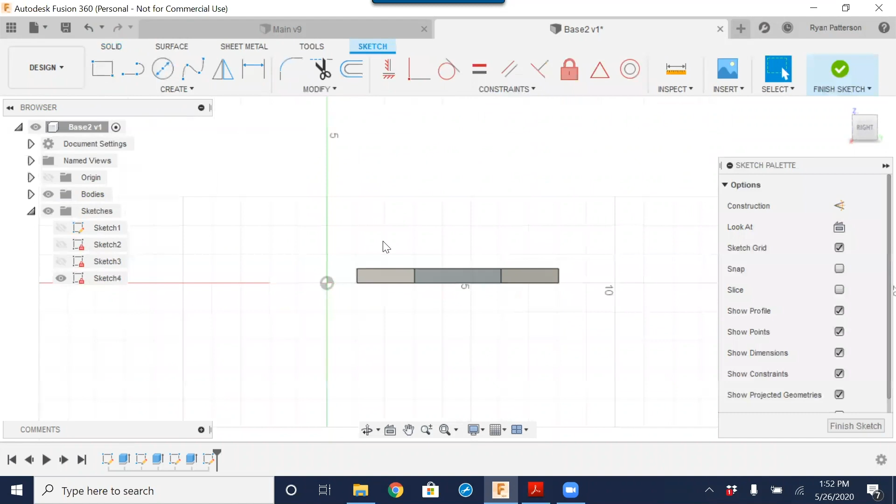I want to draw a sketch on the face of the right side. With that pre-selected, when I hit the sketch tool, it's automatically going to scale in and focus and know that I wanted that right side to be my sketch plane or my sketch face. So I'm going to do the same exact process, sketch out a rectangle, and just start constraining this in place.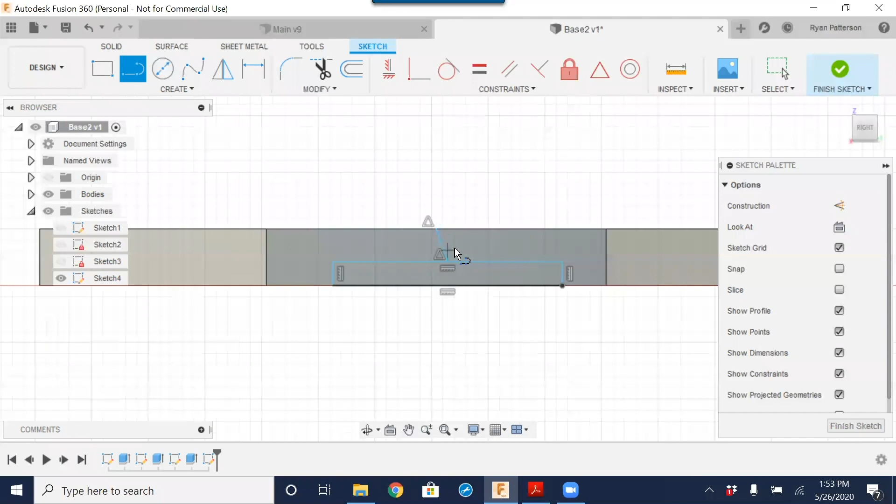Now, if there is a time where that's a line that really should have been a construction line, we could change that by simply right-clicking on that line. Just undid what I did. So midpoint to midpoint. That is a line, not a construction line. It's not a construction line because I didn't click the construction line first.

You don't have to delete it. You don't have to start over. You could just simply right-click and come down and say that you want it to be a construction line. And the opposite of that, if you have a construction line and you wanted to make it an actual sketched line, you could right-click and come back down and say that it is a normal line. So it's a toggle.

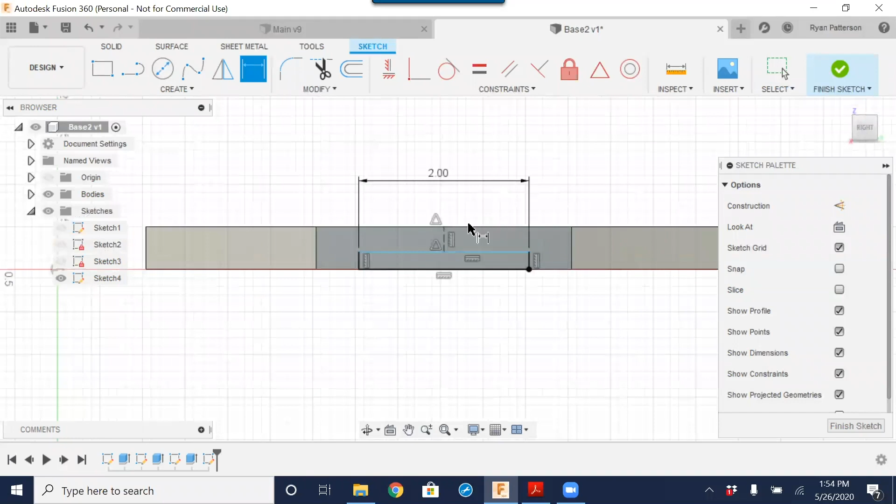So with that being a construction line, I'm going to use the horizontal tool, and then dimension. We are going to finish this sketch using the push pull. Also going to pull that out by 0.375. Then OK.

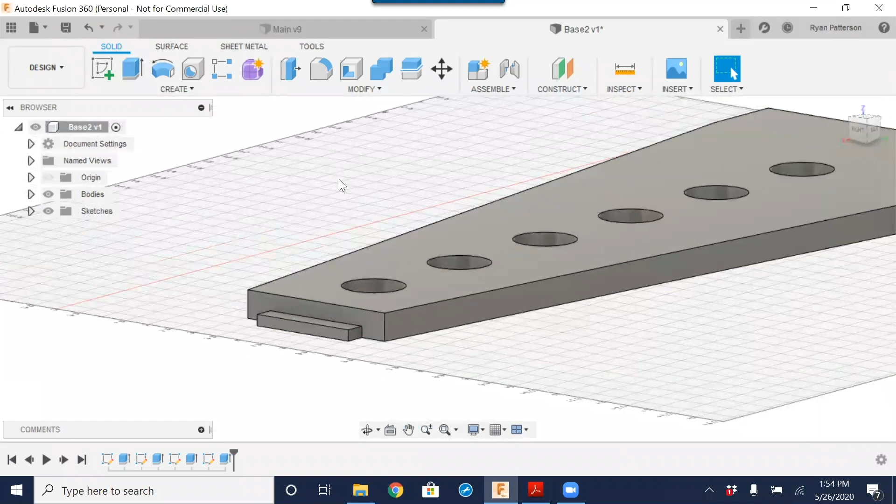So now this is the base of one item. Now there's a couple ways that we're able to do this. We could build on top of this with multiple components within one model. You could do that, and that's OK. And I would only do that if you know that you will never want to use any one of these parts in another model or another assembly again. So I like to have them completely separate, and then later we will join them and build them together.

So this is really the starting point or the key processes of creating drawings and sketches. On Thursday, we're going to focus on how do we make more of these objects, and also how are we going to create an assembly of this. So it is an unsaved item. I know that because the asterisk is listed there. I'm going to come over here and click Save, and then Save.

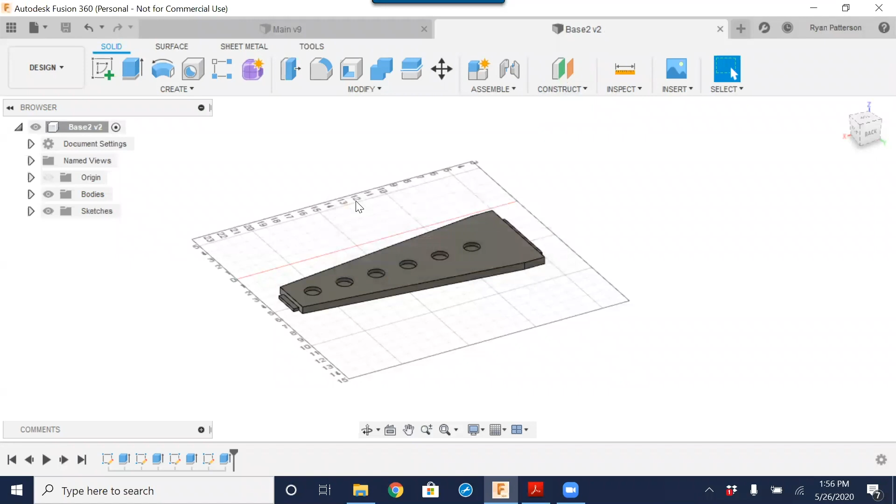So to explain a little bit about assemblies and the reason why I like to have them completely separate, because I could come in and do a new component and have multiple components within this main model here. But once we do that, we are not able to use any one of these components in another product or another item again. So I don't like doing that. Preferences are up to you. We'll focus a little bit more on that when we talk about assembling these and putting those together.

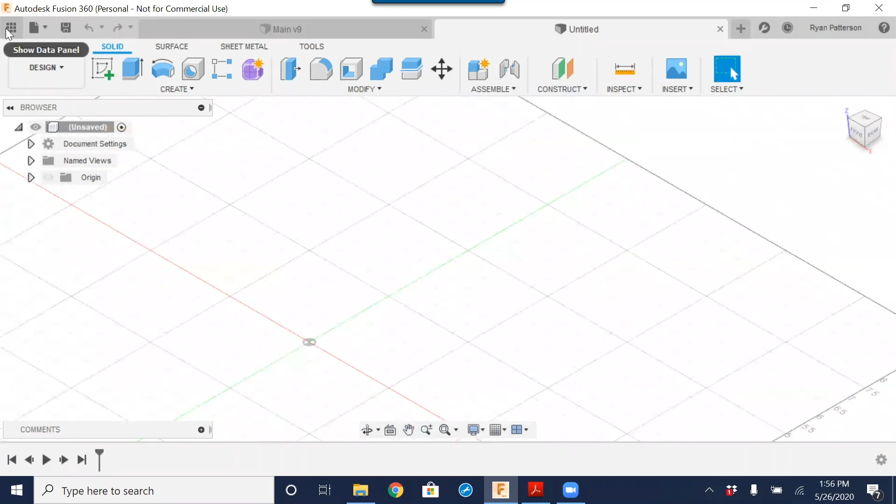So I'm going to close that, and I'm not going to save it with that added item there. So assembly is what we have right here, just a quick overview so we could see what we're going to look at Thursday. I just hit a new product. We have a blank canvas again. It is untitled. I'm going to open up my data panel, and I already have these parts drawn out. So there is the base. So with that base done and complete, I'm just going to drag that over into my modeling space.

It does want me to save first. I'm just going to call that test.

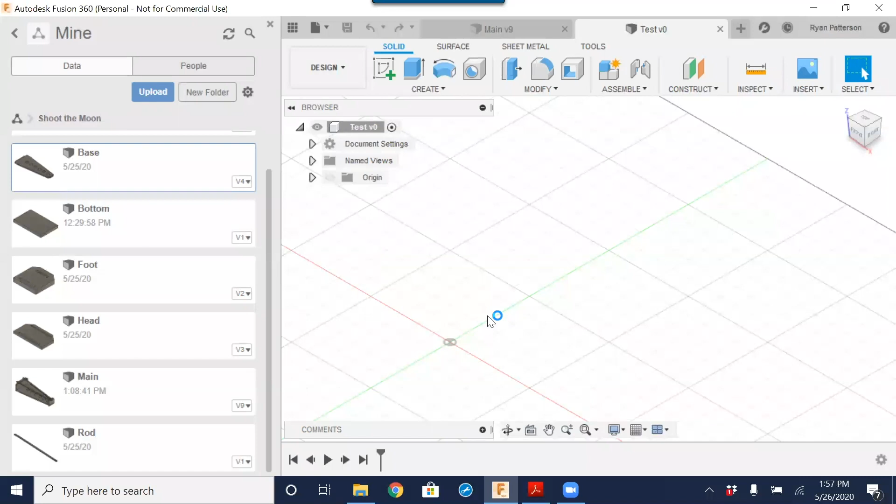And now it's brought in. I can move this around, but I'm not really worried about exactly where it's placed because this is just for visualizing where we are, not about where it's going to cut. I'm going to say OK.

Now, one thing you've noticed in the tree, we have this little linkage chain there. That means it is linked to this design or that product. So if I use this in multiple assemblies or multiple products across a product line, I could edit it just once and it will automatically change all the other products as well, as long as they are linked together.

We'll talk more about that on Thursday. Just to view how an assembly is done, to get an overview, here is the foot, which is the bottom section that is here. I'm just going to drag that in and place it down.

So if you are coming from SolidWorks or Inventor to constrain or assemble, you usually have to have multiple constraint points. Fusion calls them joints.

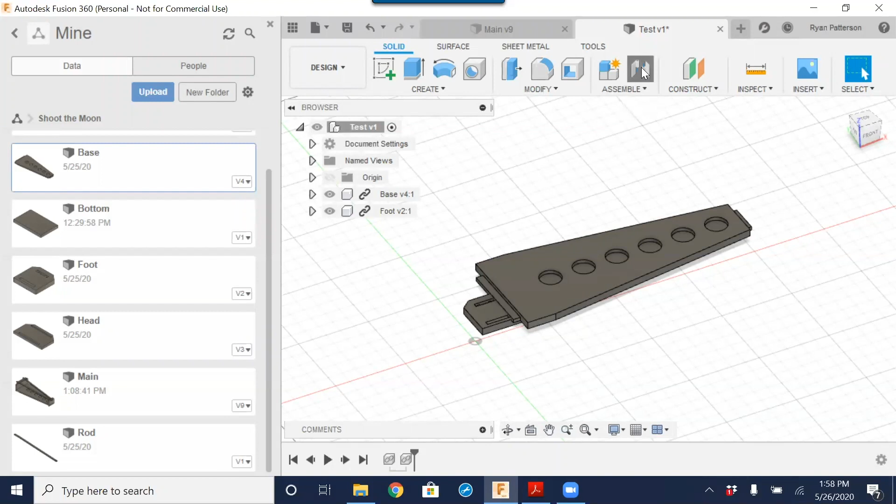So this joint, if I want to have - first I'm going to ground this product right here, meaning it's not going to move. Right click, make that ground. And again, this is not part of this, it's an overview. We'll get more detail about this later.

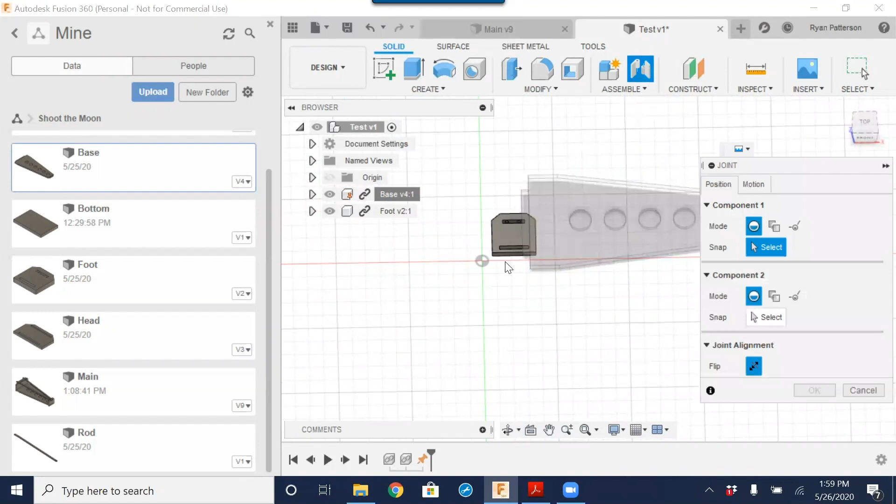So I'm going to make a joint. I'm going to make that point the same as that point right there. I didn't select the right point. I should have selected out here.

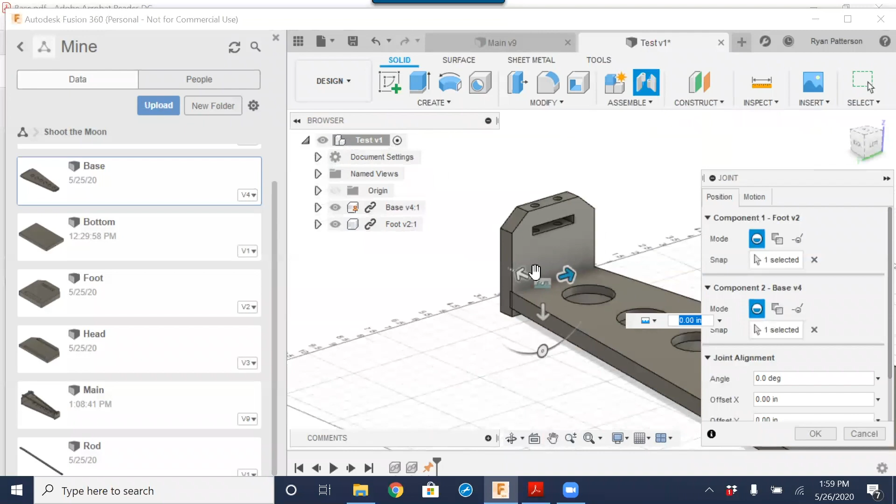So to do that, I'm going to click the X here and come in and select that point. And we can see that it has just locked itself into place and set its location.

And we can see, based on the constraints that I have set and the locations, that we have a collision here. We'll talk more about that next Thursday and learn how we could avoid collisions like this, and learn more about constraining and also being able to add motion and rotational linkages in joints together.

So I know we didn't get into cutting or even learn how to cut yet, but we have to really learn how to draw within Fusion and design within Fusion, and be able to understand the basics of Fusion before we can go farther.

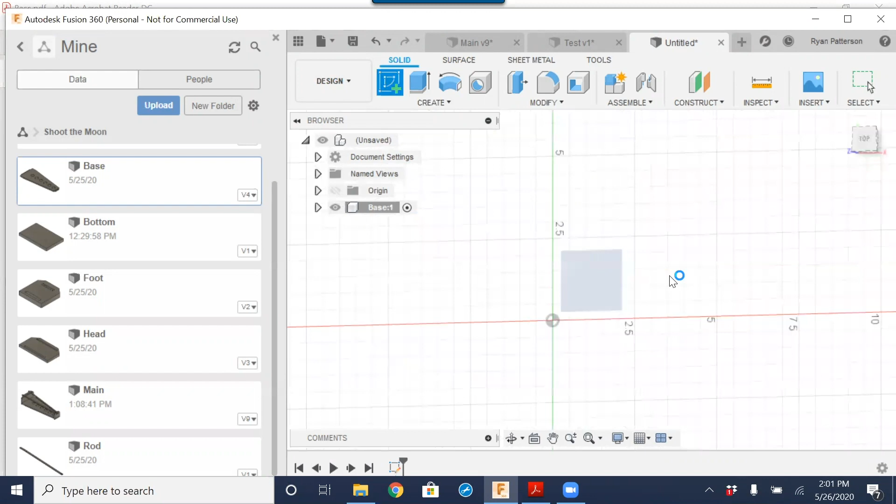So again, rule number one in Fusion is always create and work in components. So that is right-clicking, creating a new component. You can give that component a name right here. And then we would be working within this component here, always drawing out the product that you want and making it as that component.

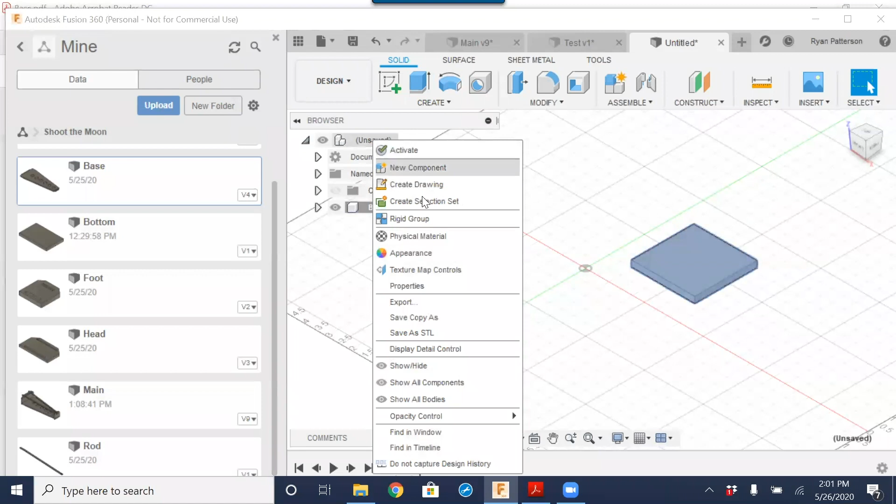There's the component with multiple components - create a new component, and it basically works the exact same way. You're able to build and use the existing component to build on top. Not necessarily how I would do it, but you can.

Next Thursday, this Thursday, we will learn why you might want to do one versus the other.

So hopefully this is going to take a total of 4 sessions to get to our finished product. So this Thursday, we're going to learn how to quickly draw out the rest of the parts needed for this, and then create them as an assembly to be able to test fit and see if the function of the product works.

Then the third session is going to talk some about two-dimensional drawings and some manufacturing. And then on the fourth day is going to be a kind of wrapping up and pulling it all together and showing maybe

another project or product as a complete start to finish, because this was an hour's time that we took to draw just that one part.

Don't let that time scare you in using Fusion. If I was not training and teaching this, the whole complete assembly product here, I think, took me 15, 20 minutes to completely draw out. So don't let the time it took me to draw just that one part shy you away from being able to jump in and design in Fusion.